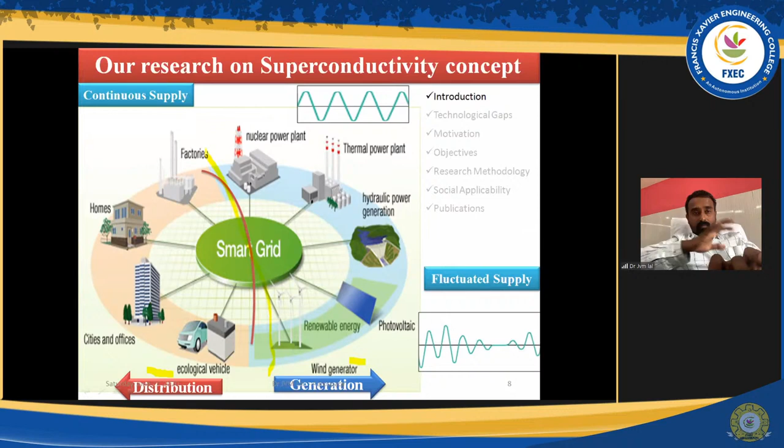Now, the challenges we face in smart grids are power cuts, voltage fluctuation, and major area is energy storage limitations. This is the major area where we are actually facing trouble in this scenario.

Now, economic losses—this is one survey we did a couple of years back, maybe around 3-4 years back. In this survey we considered only a few industries; we didn't dive deep into the aviation industry or aerospace industry.

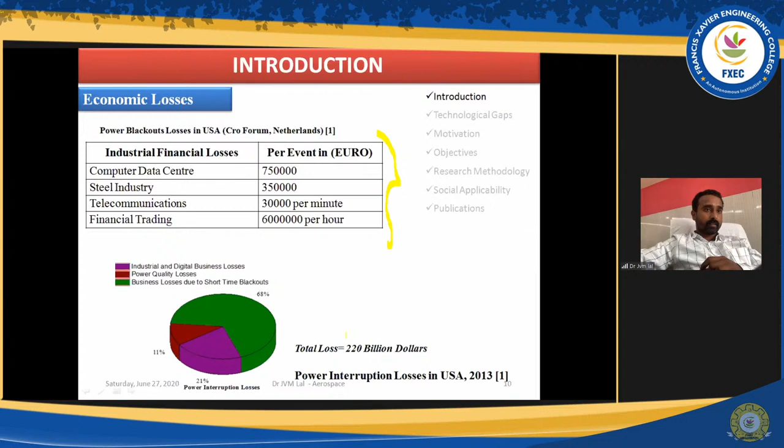Later on we went into the aerospace industry too, I will come to that point. We could understand the losses are around a few millions, and others you can see $220 billion—you can imagine how much loss we could... $220 billion, you can imagine what the losses could be that we were able to understand.

And we could find that storage was the essential problem behind this smart grid or the power generation and utility. In between these two, the actual vital phenomenon playing a role is storage.

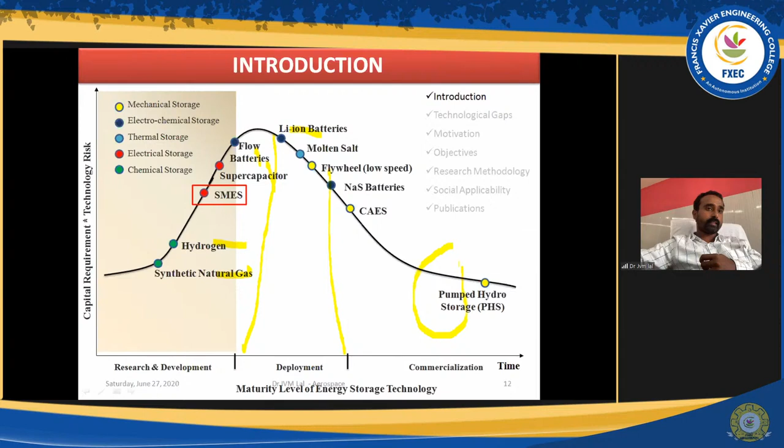Again, in storage also plenty of resources are going on, such as synthetic natural gases, hydrogen, batteries, lithium batteries. You may think, you can see here, it is already in the deployment stage, and this is actually in the commercial stage. But these guys are still in research, many concepts. You may please take a screenshot of this.

This will help upcoming researchers who could work with superconductivity. We pick this majorly because this is a system wherein we can store plenty of energy with a small device. If we could develop something with this superconducting magnet, that will be helpful for society. And this is not only in India, plenty of researchers are doing work in this area, the SMES concept.

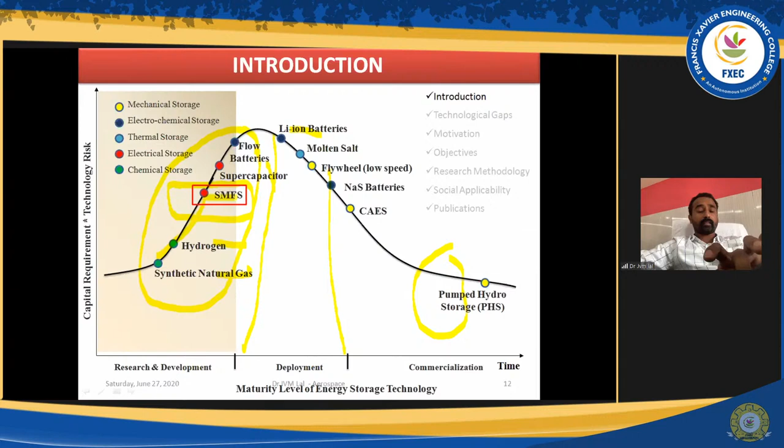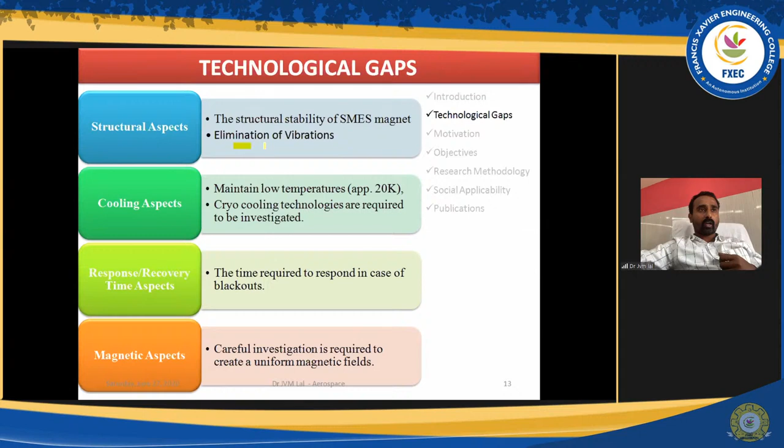And so again, technological gap - what we could find in structural aspect, cooling response, and magnetic, all four areas we could able to find the technological gap. The structural stability in terms of how we could eliminate these vibrations, and maintaining low temperature, that was a very difficult task.

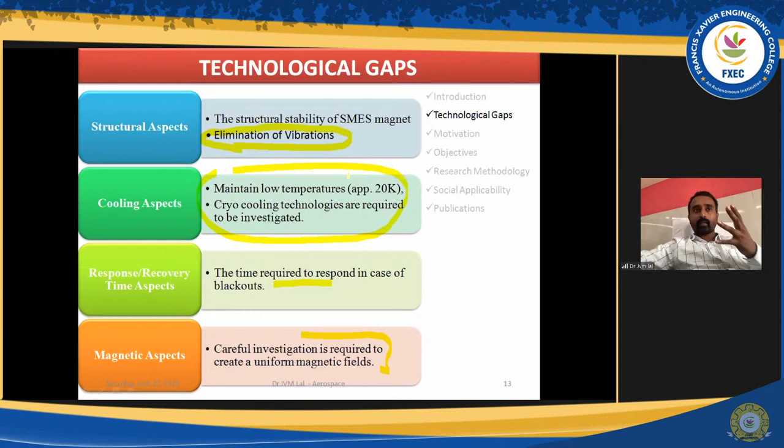Throughout our literature review, these are all the areas you can actually work out in superconductivity - this cooling property, how it could be done, the time required and response, and investigation required for uniform magnetic fields. These are the four major areas we need research in the field of superconductivity. So young researchers, this will help you, directly giving you the four major points you could work on: elimination of vibration, cooling - plenty of research is going on this, response parameters, and even in magnet, how we could create a uniform magnetic field.

Is it possible? There are plenty of simulations. Of course, we have to agree that we don't have experimental facilities in India, but simulation facilities we do have, and plenty of simulations are going on in plenty of universities. And what motivated us to do this first thing - already we could find a very big research gap.

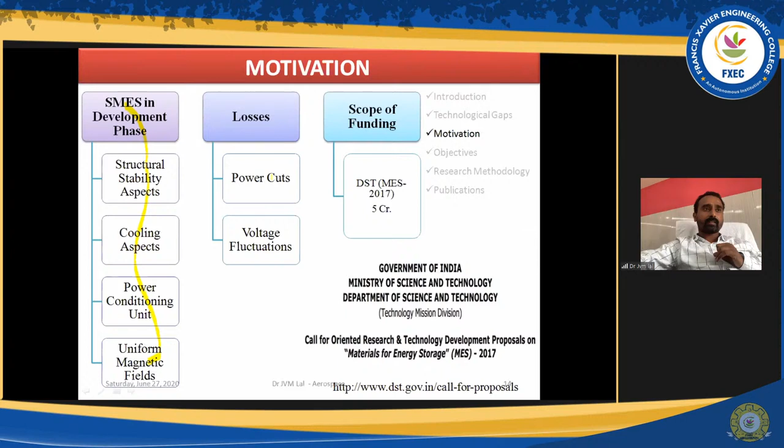So there is some fundamental gap which we could play with - that is the first aspect. And the second is this voltage fluctuation and power cuts problems society is facing. Don't take this only in terms of public or domestic utilization - you have to virtually imagine this in the sense of aerospace industry, propulsion, everywhere. Energy storage, if it is possible, that will help you. Moreover, every year, this area will help you.

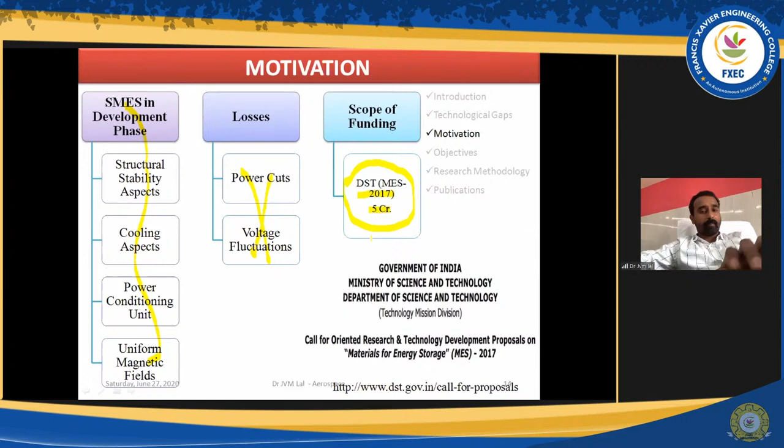I would like to give you fantastic information - DST and government funding every year spends around 5 to 6 crores only for energy storage and materials for energy storage. Look at this, every year they are spending this. So if you could come out with an excellent proposal, that will help you. Kindly note down all this information.

This will help you. In our research, our major objective was, as I discussed before, this stress and strain analysis and cryo-cooling cycle - could it be possible, and how this HTS tape configuration insulator can be given, how much thickness of insulator, how many layers we have to give. This area we have worked out, along with uniformity in energy storage estimation and uniformity in magnetic field transfer. These are all four major areas which we are working on with respect to the gap we found in the structure. Kindly note down, you can also work in this area.

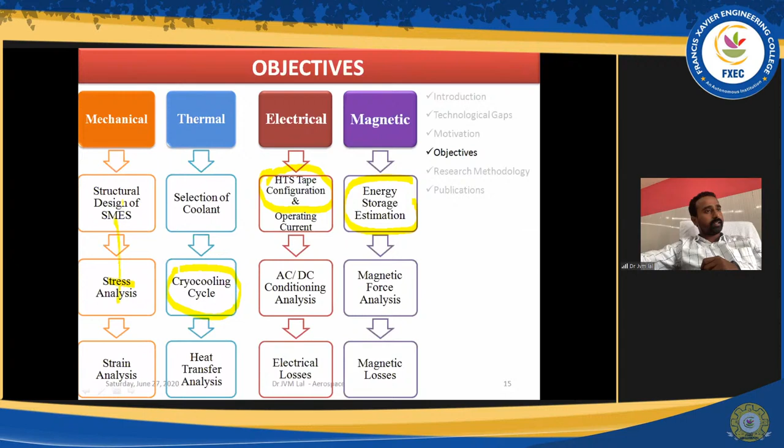We are having plenty of results. We could produce plenty of results - cooling area, and the major issue is this magnetic aspect.

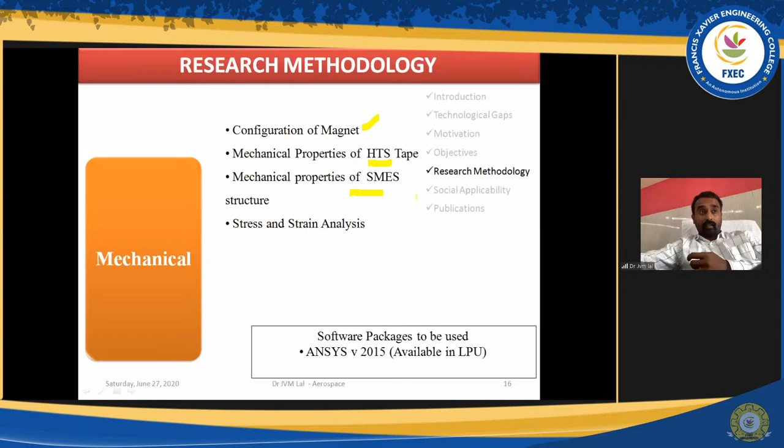Now, mechanical research methodology - what we configured is a magnet, HTS tape, that is insulator system, and SMES structure, how much turns or how many coils we have to give. That is what - how many coils we can give, how much gap we can give. That is what the simulation we work with, and stress strain analysis in the field of mechanical.

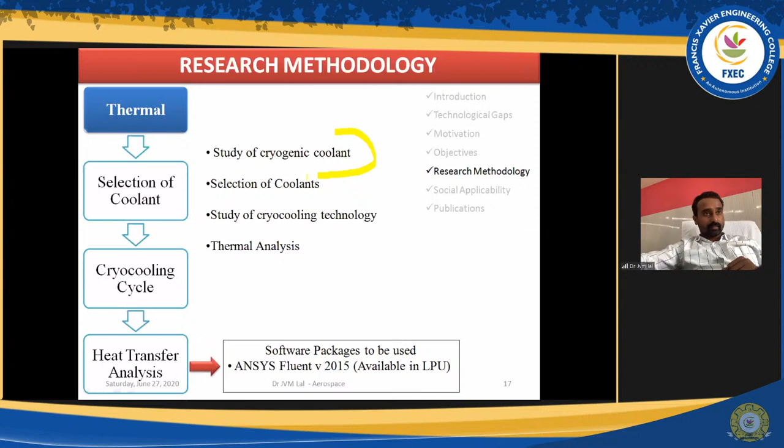And in research methodology, what we use with thermal is, first we studied on cryogenic coolant and the selection of coolant, cryocooling technology, and thermal analysis. These are the four parts we did under the thermal wing. So there are actually four wings: mechanical, thermal, electrical, and magnetic. In mechanical, I already explained which areas we worked with, and in thermal, which areas we are working with, I have already told.

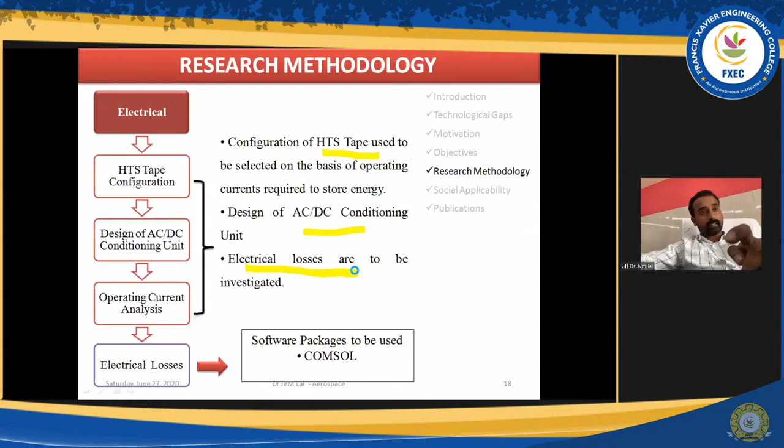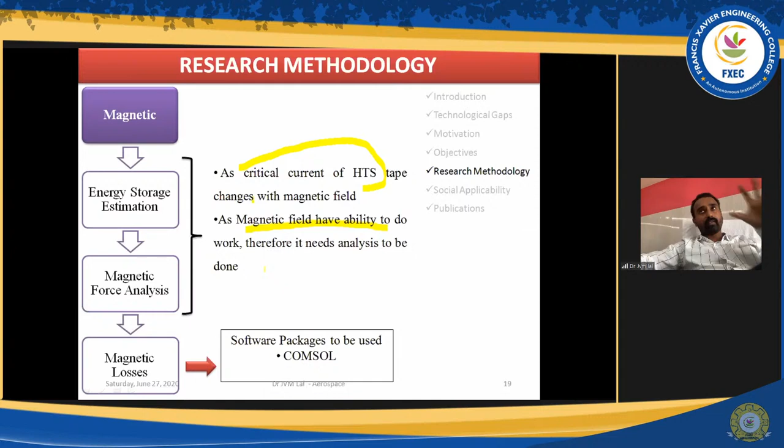And in electrical, the insulation part, AC/DC conditioning unit, and losses - electrical losses have to be investigated. So these are the four major areas which we are doing with the electrical part. And in the same way, the magnetic critical current and the magnetic field ability to do work with - these are the areas we are doing simulation, what we did and what we are doing in the magnetic area.

Out of limitation of time and out of limitation of our company profile, I couldn't give all the results, but I could give some of the results of the research we have done so far.

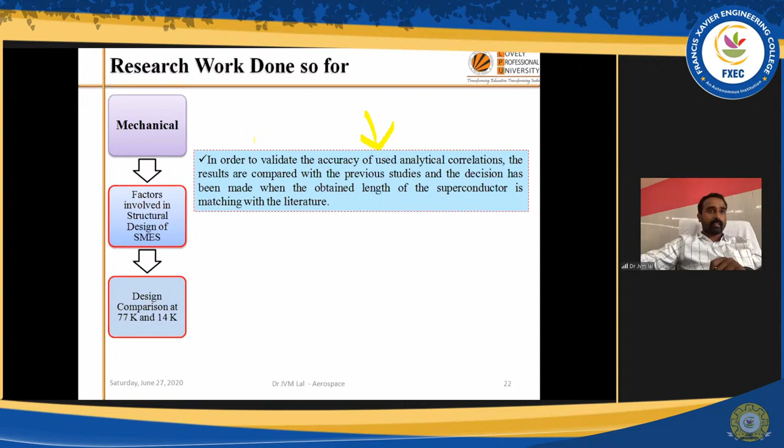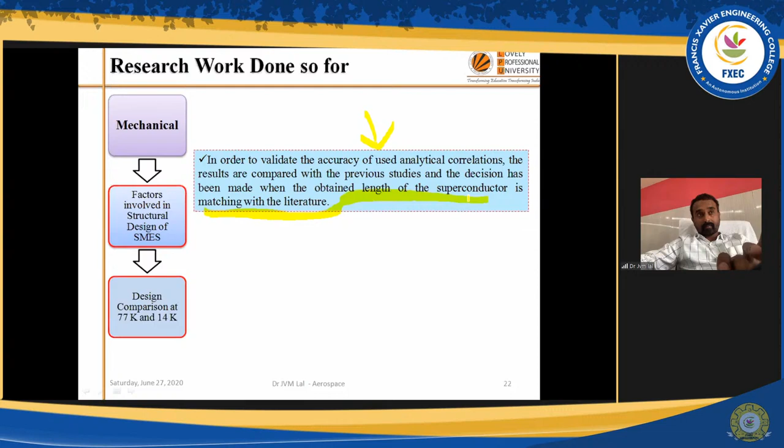Mechanical, we actually designed a comparison at 77 Kelvin and 14 Kelvin. The length of superconductor was matching with the literature. This is the accuracy used with analytical correlation. First we did our prediction to see whether it was matching with any of the literature, and it matched. Then we saw the present model reproduce the previous results with minor errors, which may be because of our operating facilities or mesh sensitivity. But in fact, it is actually matching with our results, and the old results also match with our results.

And AC losses we could find, and energy storage estimation for 77 Kelvin we could also find.

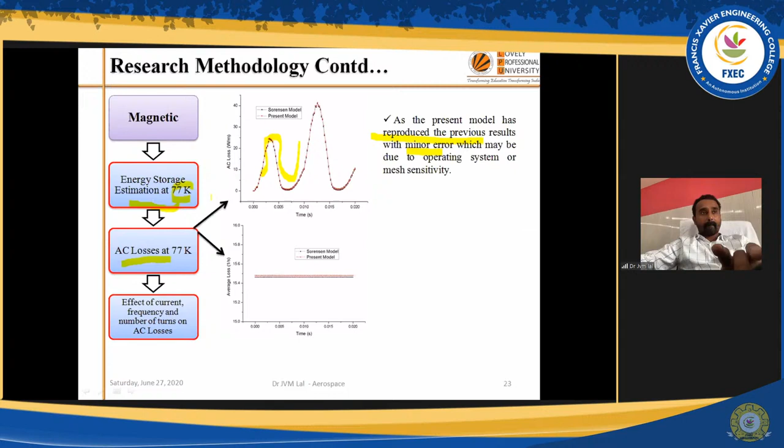And thermal, one second, there's my pointer. Look at this. We don't have that much difference between the prospect which is existing and what we did. There was a very small change which we could find, and these are all the variations we found in our results. What we used is COMSOL for this.

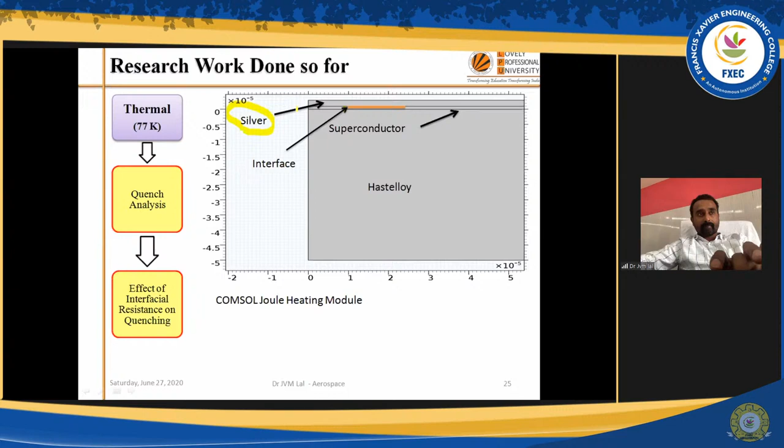In the thermal area, we worked with silver. I'd like to give you one piece of information: the best superconductor is gold, but economically it is not feasible, which is why research is going on. So if any of our researchers could produce an economically feasible material for the public or industrial society, that would be a great achievement, because very few people work with superconductivity.

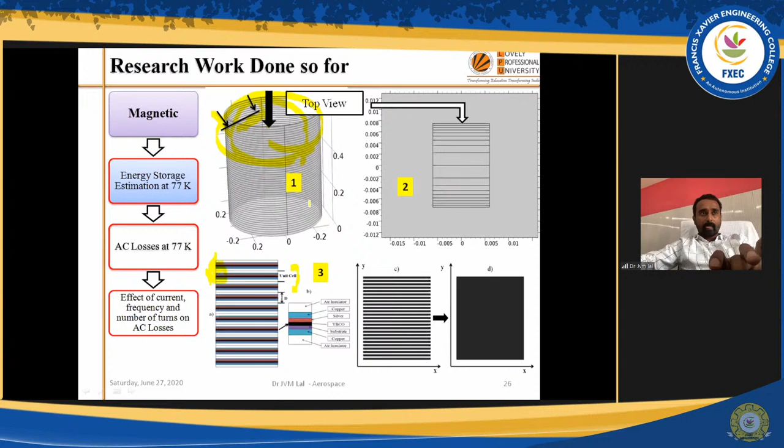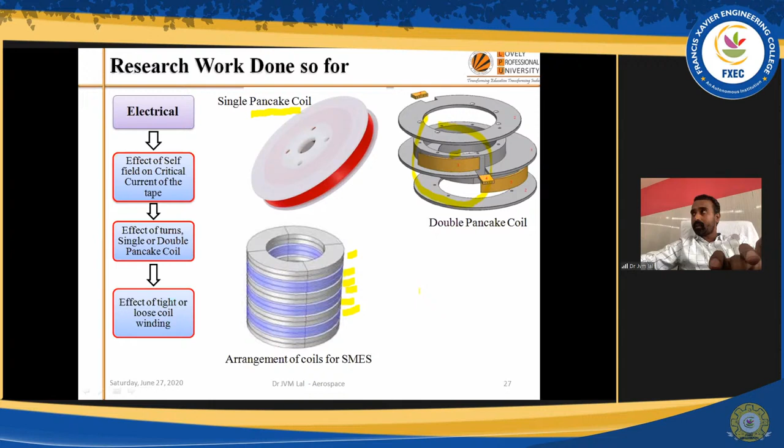In the electrical part, we actually used the pancake coil method. Look at this. We went for this type of coil method, and this is what it looks like when dismantled. Arrangements of coils for SMES - this is the type of arrangement we used. Electrically, here also we could gap the tapes, and we could find the effect of gap among the layers.

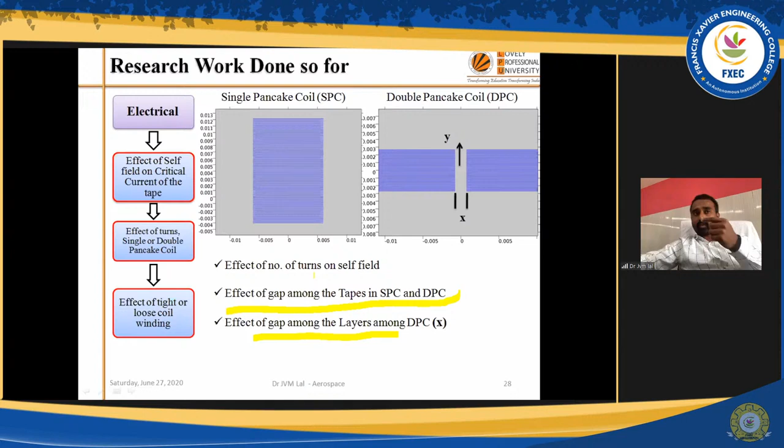We found the effect of number of turns. If we play with the number of turns, what actually happens? If we play with this gap, what actually happens? These are all the results we could find.

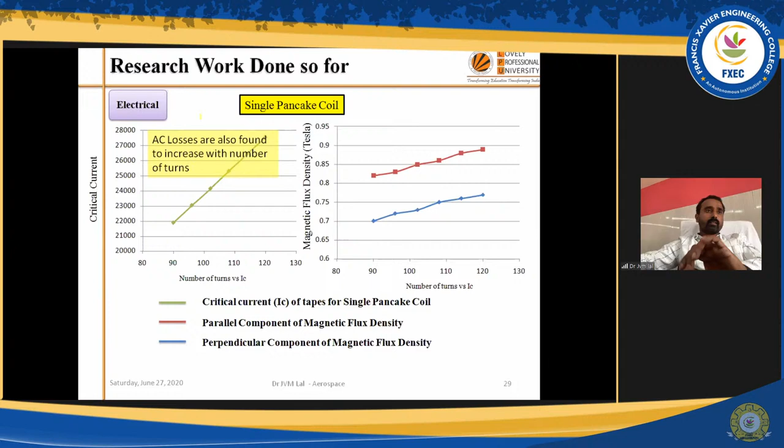Look at this - AC losses were also found to increase with the number of turns. This was one of the major findings in our research, that AC losses are found to increase with number of turns. Out of all this, it took around a few years, and we could find these terms.

So critical current and magnetic flux density - how it transfers, and the gap - how it drops down. So we have to take a balance on these two things.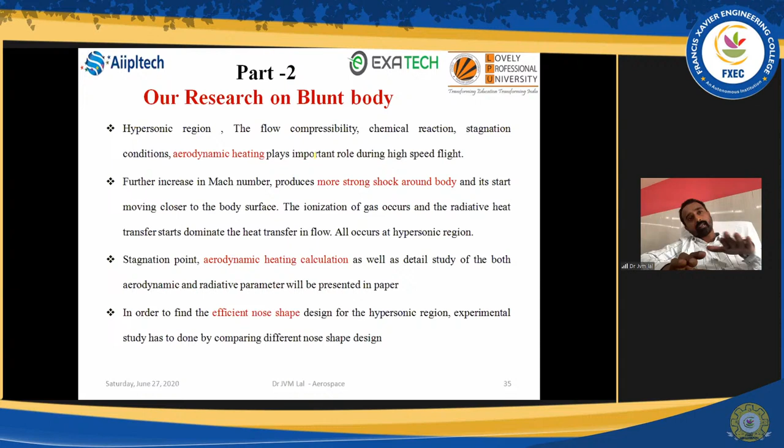Now we will jump into the second part of research on blunt body. Before that, I would like to tell you about hyposonic and hypersonic. Hyposonic is a technical term which we use for subsonic regions, low subsonic layer. Hypersonic is beyond Mach number 10, 11, 12, 14, all those stuff, and even hyper velocity flow regions is also there. As researchers you might be knowing, and you can fill with Q&As, I can explain you.

Now I will jump into that blunt body concept. Why we want to go for blunt body? If you consider this as a conical probe or a re-entry vehicle or an object, if it travels at subsonic level, this shock wave is not going to affect this body. But if you keep on increasing the velocity of this object, this shock wave initially comes here, then it will get attached.

Once it gets attached, this space gets closer to the body. Because this space comes closer to this shock layer, this normal shock layer, then it becomes a bow shock, then an attached shock, and then this guy plays as a radiating shock layer, absorbing heat with no gap to exhaust it. So it reflects, hits this shock layer, and again hits the body, creating a more strong shock.

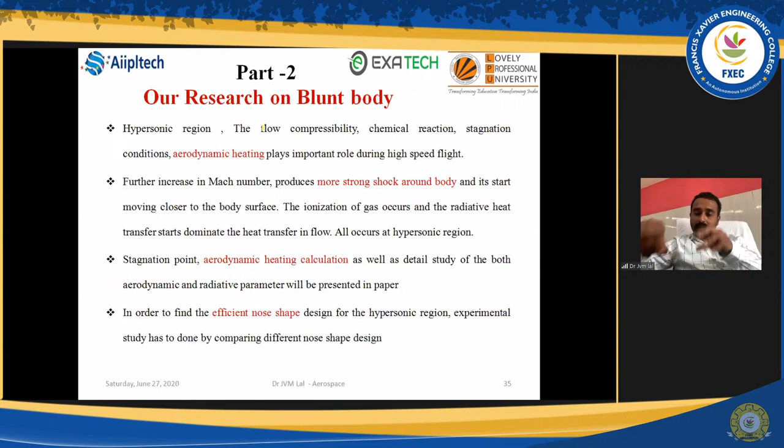Around the body, this aerodynamic heating calculation and efficient nose shape are the parameters we have to optimize. So we have to play with the blunt body, we have to play with the velocity, and we have to play with the altitude, and how the layer reacts, say at escape velocity, and once it crosses the troposphere, how it is going to react.

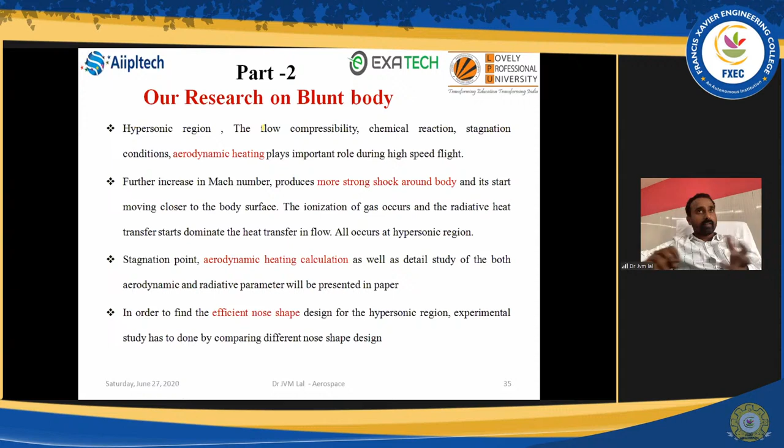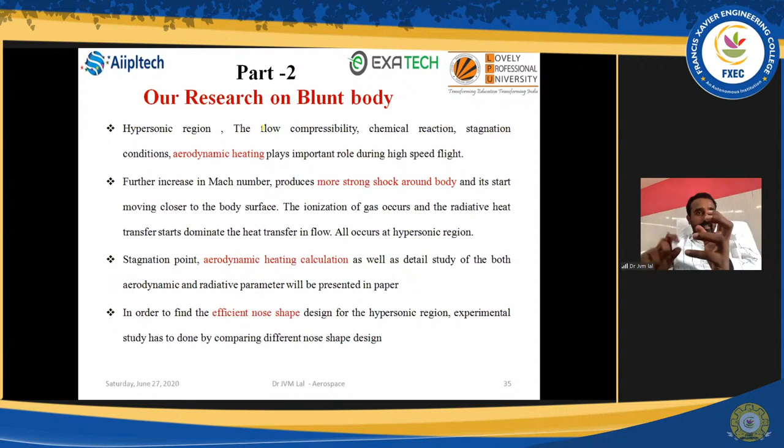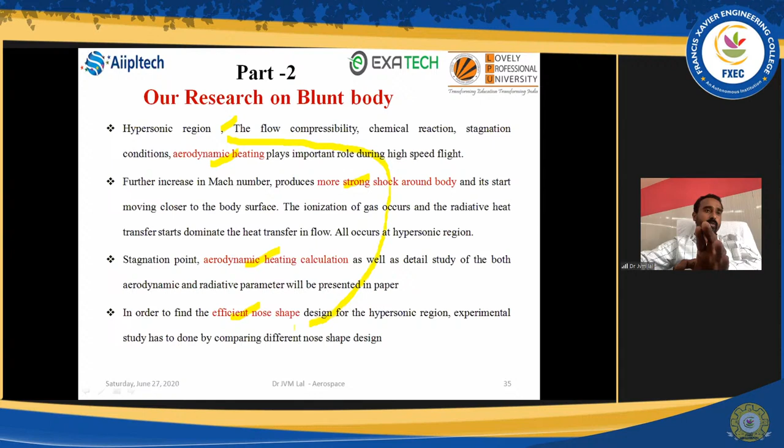So we have planned to come out with a coupled equation which could be useful for society, wherein for all these parameters - body, velocity, and altitude - if we could sync all this and give a common mathematical model, that will be helpful. This aerodynamic heating, more strong shock waves, heat calculation, and nose shape - we plan to optimize these four points in a generic equation.

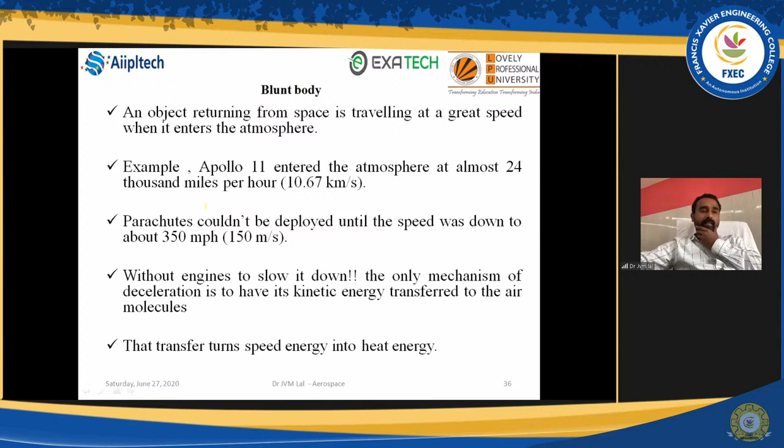Our objective was, for example, I would like to tell that Apollo 11, a few years back, once it crosses the escape velocity, it should have this velocity - imagine 10.67 kilometer per second. It will impact the region once it enters the earth's surface, and it is not possible to open or deploy the parachute at that velocity. So this object falls down at 10 kilometer per second, and we couldn't able to deploy the parachute even to reduce this.

So what is the only source? Energy. We have to play with the energy, no other source, because engine is not there. Once the vehicle re-enters, engine power control is not there, engines are not there. Only with the help of energy we are going to play. And what energy is available? Only kinetic energy, and the flow field around the body - that is what the two things available.

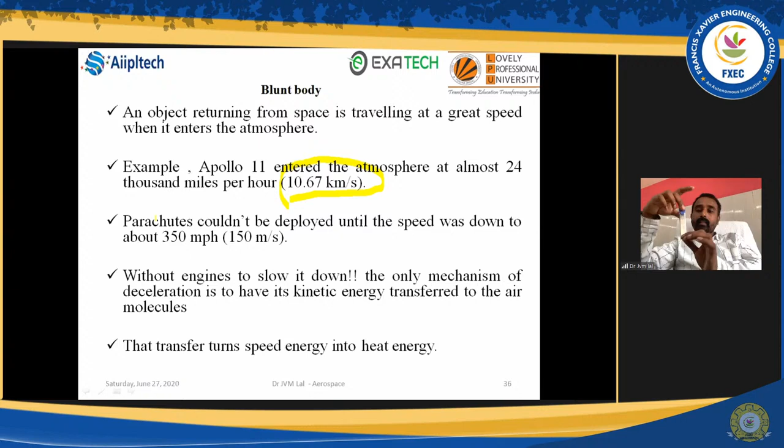The flow field, again, we have to control it. Heat energy plays a role. Got it? An object enters the earth - once it enters the surface, the velocity will be very high, 10.67 kilometer per second, and there is no power plants or anything which we could control. The only option is parachute, but at that velocity we can't open it - we can open only if it is 150 meter per second. So at this point we can play only with the energies. Energy has to be transformed somewhere, and we have to release the velocity.

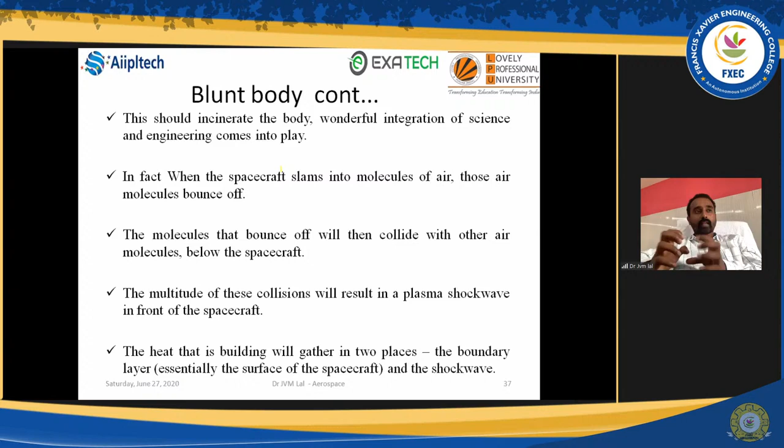And now the wonderful science comes into the picture - integration of science and engineering comes into the picture. So these air molecules will bounce off, and the only way we can play in this region is we have to play with shock waves. So detaching the shock waves, giving them enough space so that the heat can be transferred somewhere. We have to give a gap so that this generated heat can travel somewhere.

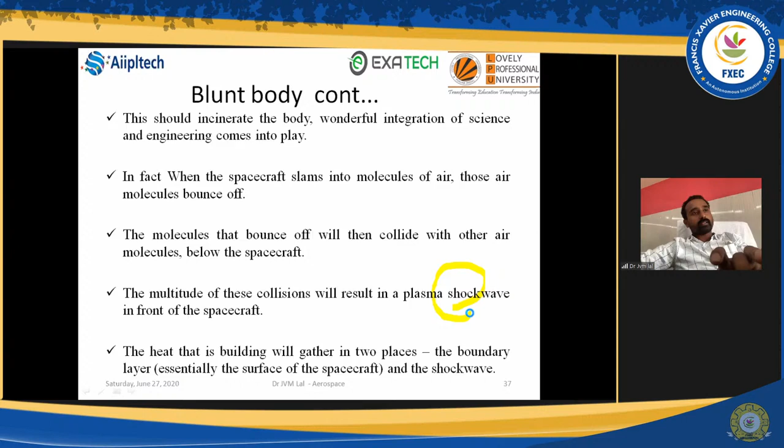That is the only option. That is why we went into this research and gathering shock waves, how it can be done, and how this blunt shape can be largely played.

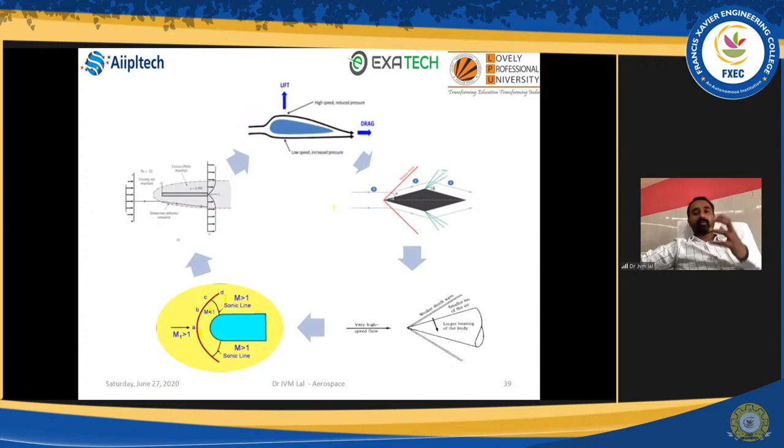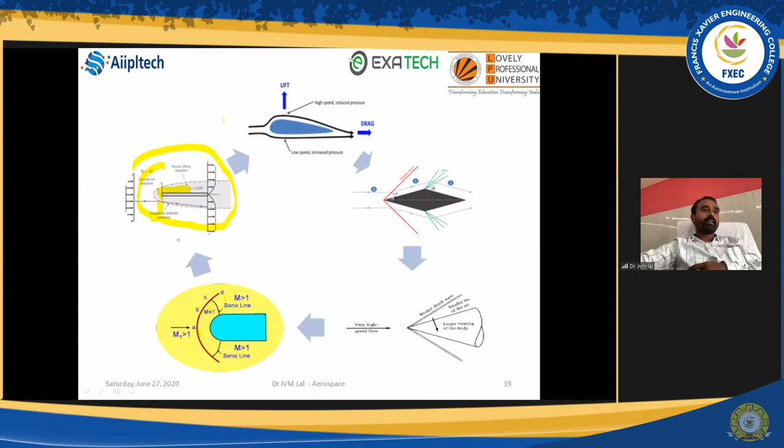These are all the areas we work. And this, like a food chain, there is an aerospace chain. You can call this an aerofoil chain or aerospace chain. Look, initially Pushpaka Vimana, those people, right from this, they started with a rectangle shape. So what they found was drag. Then we went to this wonderful design for subsonic, this shape, what we call airfoil.

Then we keep on increasing the velocity. We went for wedge, but the shock wave started formation, and it was attached, and it is not going to affect if it is within the limits. Altitude limit, no issues.

Then once we enter space, this gap plays a role. You can see this gap between the shock and the surface. This started playing the role. So now this generated heat has no way to escape. So it will hit back the object, and it tends to damage the object.

So again we went for this blunt body, so that we could detach the shock, and we could create a space. But speaking, it is very easy, but detaching this wave up to one extent, how we can enlarge it, what kind of angle we can give, it's a very big phenomenon which has to be done.

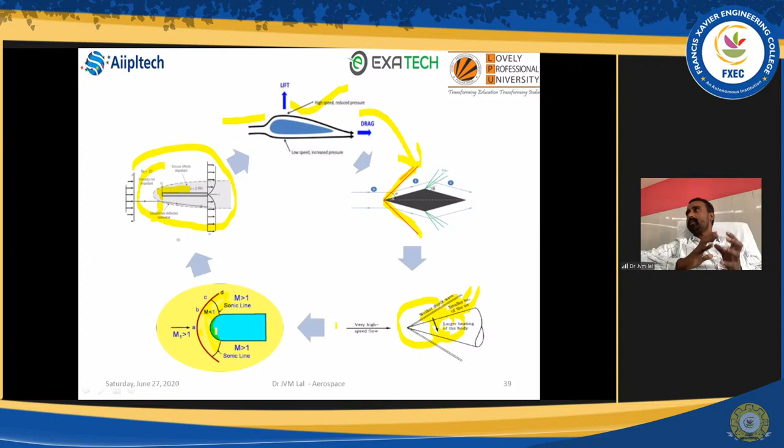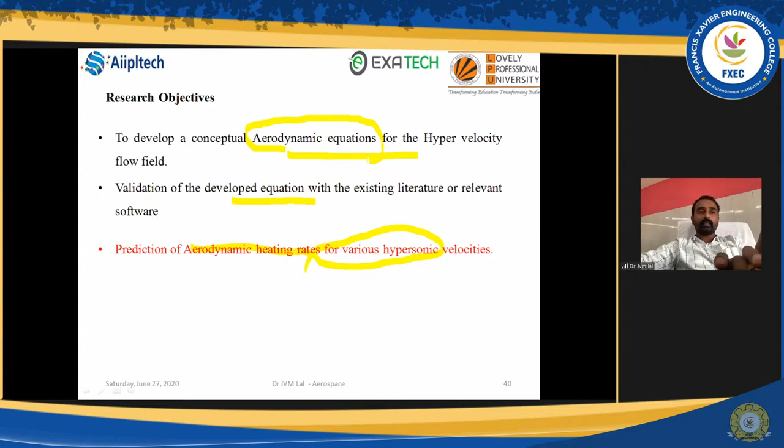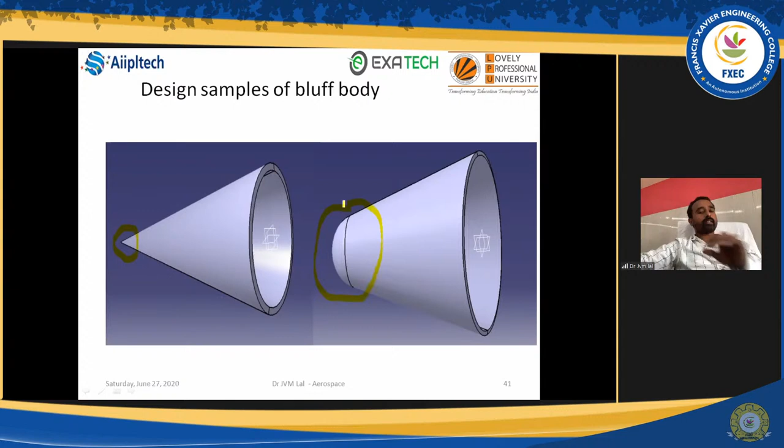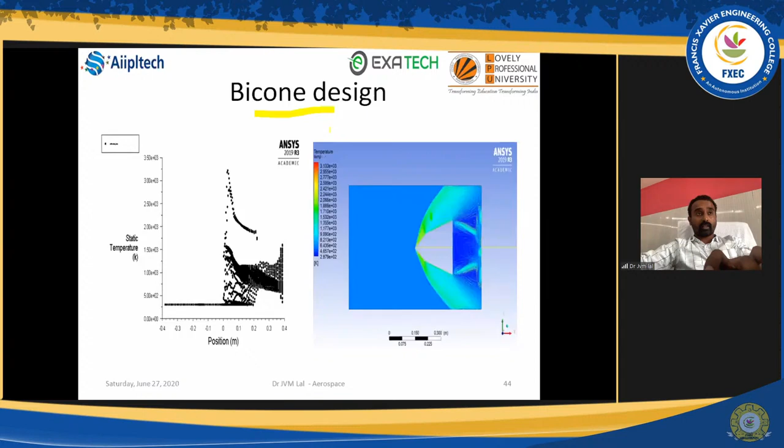So again, for initial stages, we try to create plenty of blunt bodies with the existing literature and with our own predictions. We could give some plenty of blunt bodies such as bicone, blunt cone, conic, blunt tangent ogive, and ogive methods. These are all the basic cones which we are working with. It is not limited. We are actually working with around 40 to 50 shapes and plenty of results. We could get thousands of results.

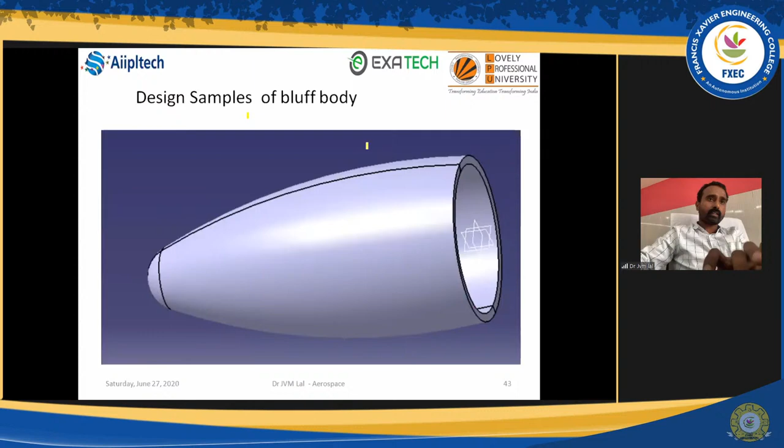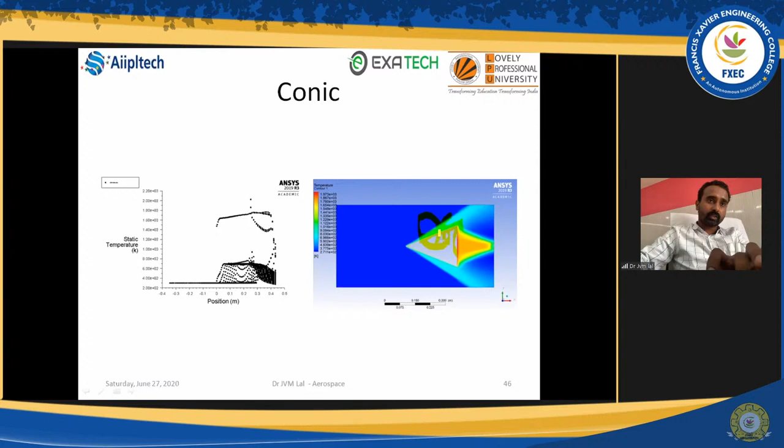On this particular research, in biocone, you can see the gap. You can see how it behaves here, and here how it behaves. And here you look, it is not at all suitable because this shock, there is no space for the heat to escape. And of course, the tangent ogive is okay, is fine.

And now we will jump into the 3rd part of our presentation, that is actually hyposonic and hypersonic flow instruments.

So normally, say we'll consider in sports dynamics or sports aerodynamics, football, racquet, cricket bat, stem, if you consider the sports, and if you go into the automobile front bonnet, backspace, the curvature, drag, frontal velocity, and those things we use. If you go with aerospace, every inch by inch we will collect and gather these aerodynamic parameters over it.

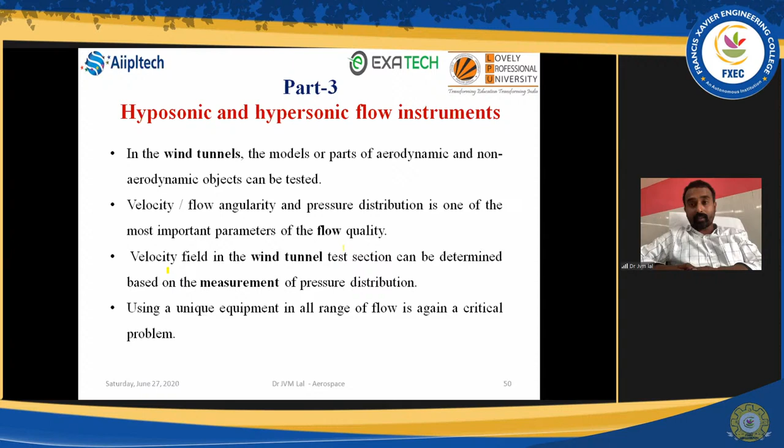Because as we discussed earlier, this cone - say, again I will take this as an example - if this cone decreases, we can go for higher velocity. But if this cone angle increases, the sensitivity of the reading we got will be good. So we have to optimize these two parameters. If we go for low cone angle, we can go for measuring high velocity flow. If we go for high cone angle, we will get a good sensitivity reading. So we are in a position to optimize this, where we could use it at Mach 2.5, or from Mach 0.1 to 2.5. That is what we were doing, and this is what we discussed.

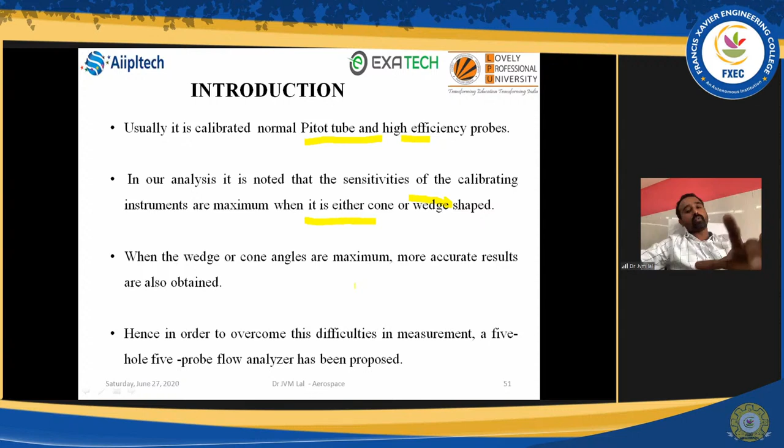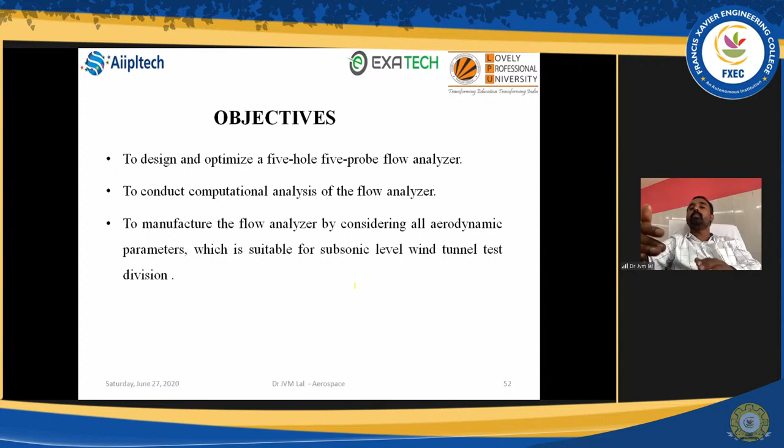Usually we go for normal pitot tube and high efficiency probe for supersonic, and even we go for wedge, sphere, maximum correlation - plenty of that. So what we have planned is, why shouldn't we go for a 5 probe with 20 tapping or 25 tapping, wherein we could graph it out and give a grid calibration methodology to the society and to the academicians, so that upcoming researchers can predict what might be the velocity at that particular point, which will help them move further for the next research. And this is what we planned, a subsonic level wind tunnel test division for different Mach numbers.

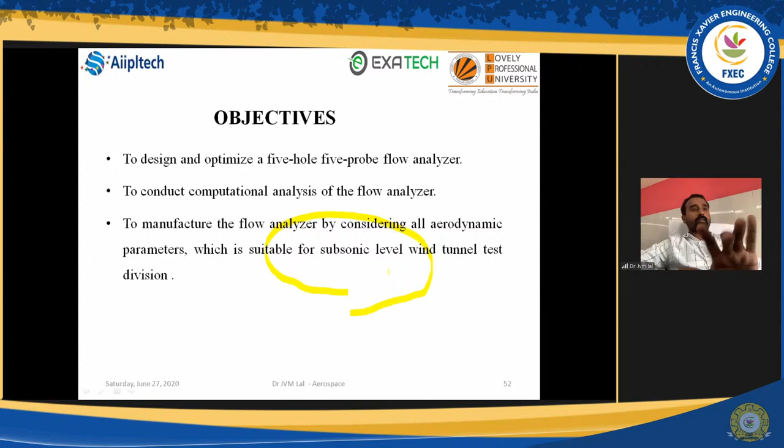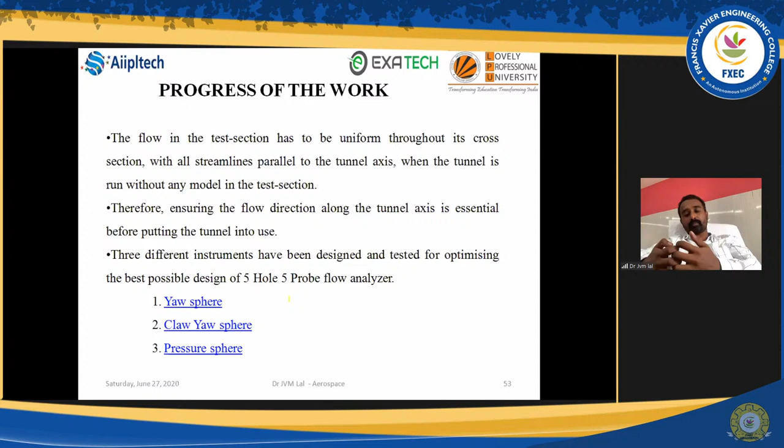Before jumping into this particular research, or before manufacturing or designing this particular instrument, we actually did a very excellent background work. Yaw sphere, claw yaw sphere, pressure distribution, plenty of others, thousands of others - they came out with thousands of results and thousands of instruments. We could shortlist a few of them which are relevant to our research, and we manufactured that. We experimented and we simulated, and we could come out with plenty of results.

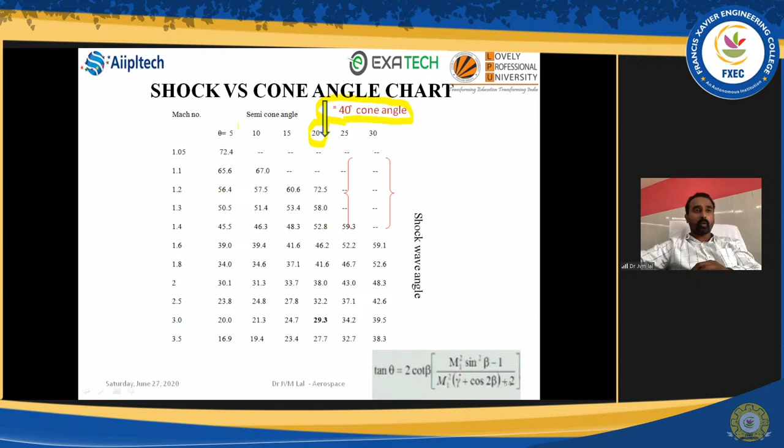These results, as per my suggestion, kindly take note of this - it will help you if you are interested in this particular area of research. This 20-degree cone angle is actually a semi-cone angle. In the sense, a 40-degree cone will be best suited for up to 2.5 Mach, and a few areas are detached, as you can see from here. So you can see the shock angle will be 29.3 for Mach 3. So it will be well suited.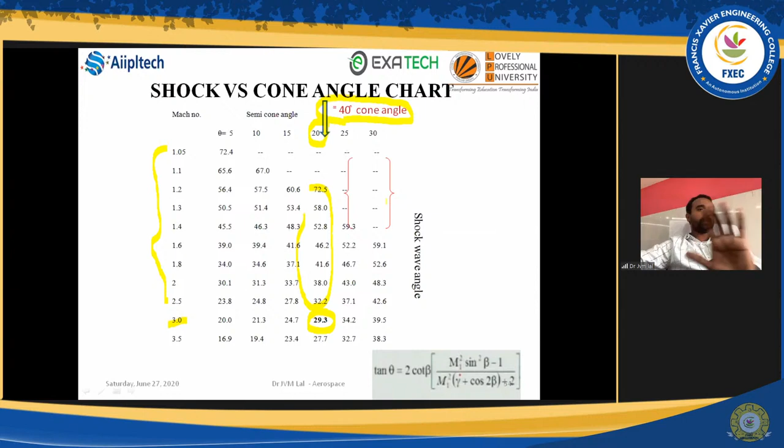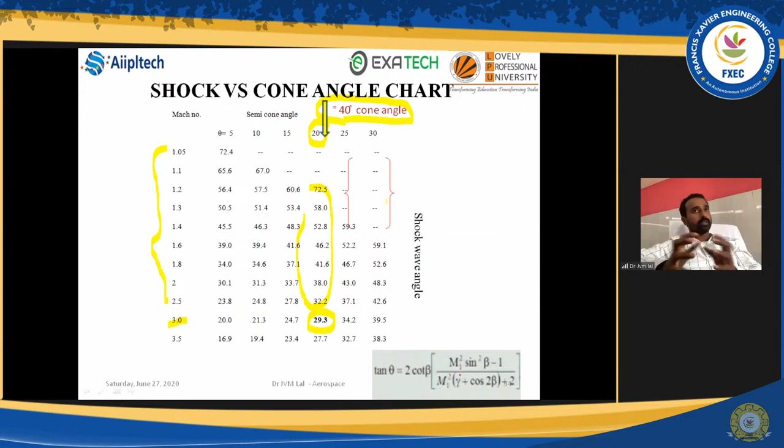As per our research, in the upcoming slides I will let you know how it will be. So hope you understood - again, I am repeating, once the cone angle increases, the reading we get will be excellent in sensitivity. Once the cone angle decreases, we can go for high velocities. So if you could play with these two parameters, I'm sure you can come out with plenty of results, and that will be helpful for the society, those who are working in this particular field.

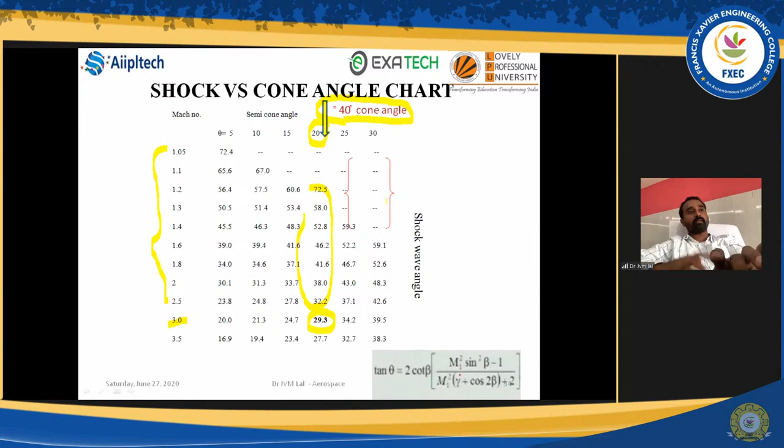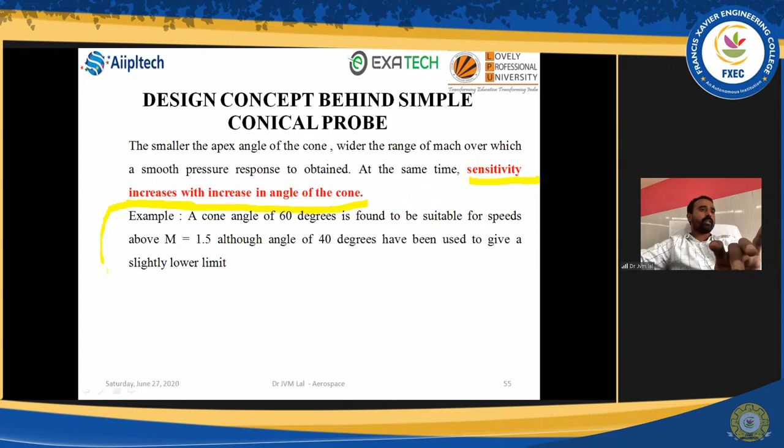This is what I was discussing - sensitivity increases with increase in cone angle. An example I have given is a representative one - you can read this, it shows up to what Mach number we can go, what is the shock angle, 40 degrees have been used, and why we can go there. So this is one example I could give you.

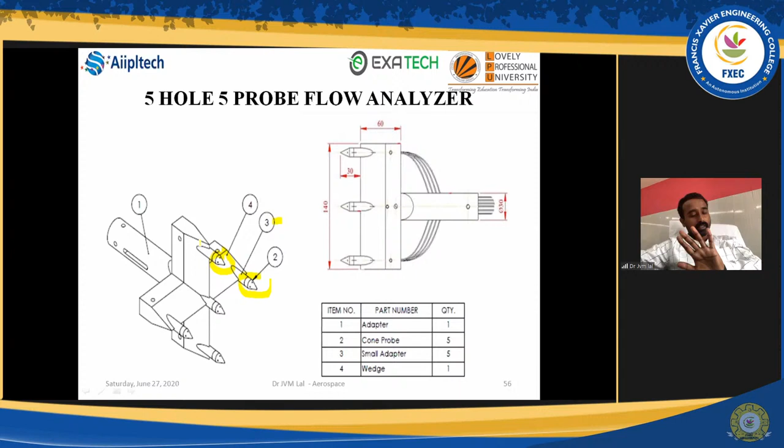Say, this is one of the probes we could realize, and very soon we are going to manufacture this. In the same way, 3 probes we already manufactured, and we had applied for a patent also. Look at this - there are 5 holes actually, so total 25 holes, and at a time you will get a 25 point grid. We could find around 1,000 grid points inside the test section, and we can plot that in a polar curve, which gives enormous data for the researchers who are going to use that particular facility.

Look at this. This is what we discussed, semi-cone angle. And one more thing you should know. So let this be the surface. If you want to predict the flow somewhere here, the flow holes or tapings should be perpendicular to the surface, not aligned with the flow. So you should know this.

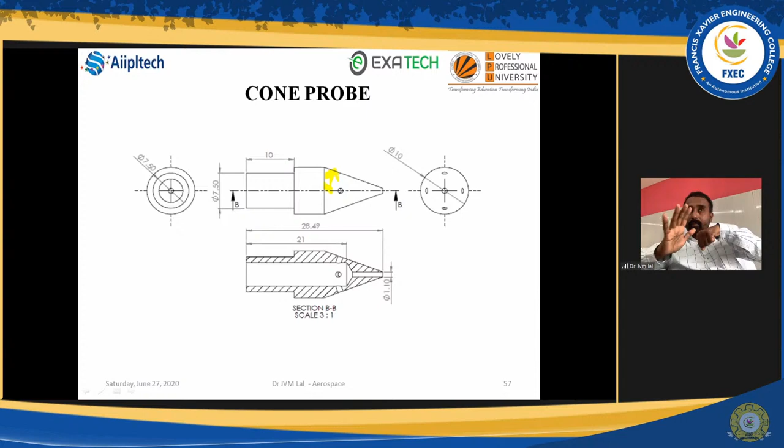Actually, you will get confused. Say, if you are going to use one conical probe to measure X or Y flow, let it be viscous or inviscid flow, that is not going to affect this. But these holes should be, as a thumb rule, perpendicular to the surface, not aligned with or parallel to the flow. Forget about the flow direction - flow angularity can be identified separately.

This should be perpendicular. Got it? This flow taping, kindly look into my screen. This flow taping should be perpendicular.

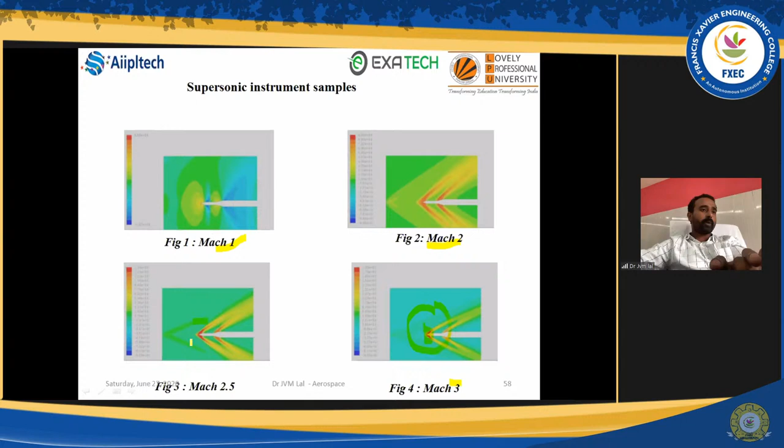Hope you understood. We played with different Mach number ranges - 2, 3, 2.5 - and we could find that we can go up to 2.5. So this is a wonderful result we got. And then we went for three-dimensional meshing also, and there too, up to 2.5 Mach number it was excellent, and 1.2 Mach number was also excellent. And these are all the 3D sample results we got.

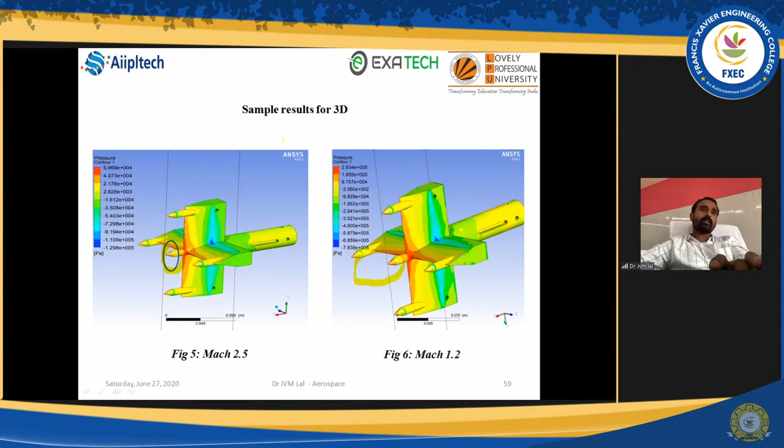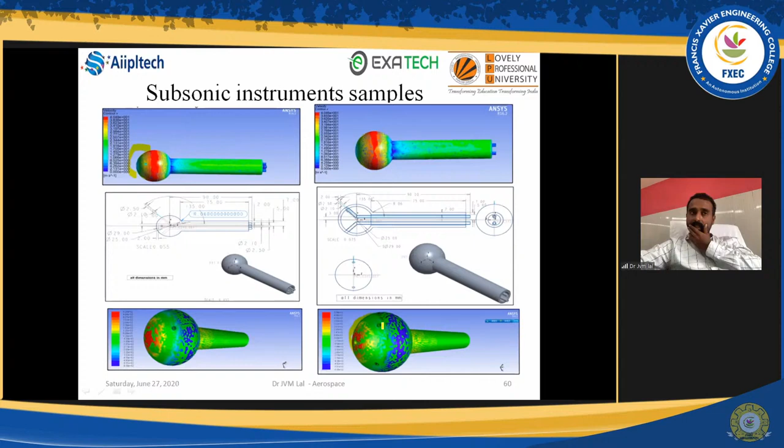We didn't stop with the research. We went for a sphere with 2 holes, how it could work, and with 5 holes, how it is working. And we have actually manufactured it, and we got experimental data also for this. If you are interested, write to us, we will give you the data, if you are really interested in this research in this particular lab. These are all the research outcomes we could produce.

I'd like to give sincere thanks to my research team. They have published more than 35 research articles, all SCI and Scopus indexed articles in the last 1 year. We have filed 3 copyrights, 2 books already published in the field of renewable energy and current trends in aerospace, and 1 PhD already produced, awarded, and 2 patents we have applied for.

So these are, I'm giving a very small background of the work we are doing, given time limitations. Again, I will summarize overall. I would like to summarize.

Superconductivity is an excellent area. If you are really interested in research, you can go for 4 major research gaps, or you can even work with all 4: mechanical, electrical, thermal, and magnetic fields. I have already given you the research gaps available, the fundings available for that particular slab, and the verticals you can work with. These are the 4 verticals you can work with in superconductivity.

And in blunt body, how this aerofoil shape plays a role, and for hypervelocity, blunt body plays a role. If you could give a generic mathematical model for all by optimizing 3 parameters - aerodynamic parameters, altitude, and velocity - this aerodynamic heating, the technical term for which is radiating shock layer, if you could optimize with these parameters, that is a good area of research.

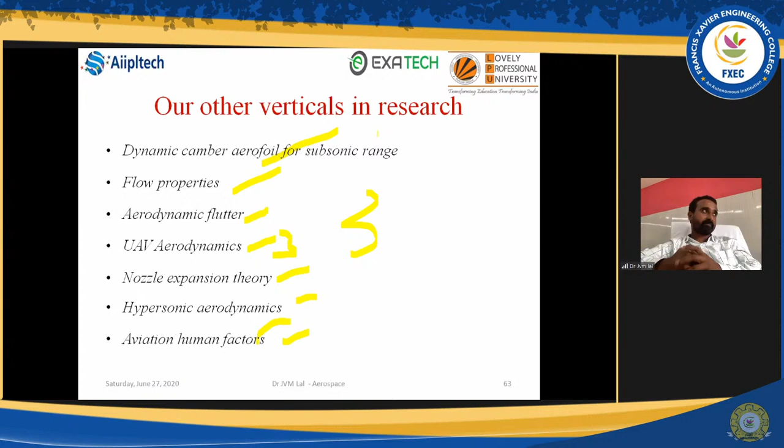Thank you sir, the final question from our participants: for simulation, do we use ANSYS software or any other? If you can suggest, sir, for simulation do we use ANSYS software, one of the softwares, or any other? I understood the question - wherever I go, there will be a question like this.

Actually dear participants, ANSYS, Nastran, MATLAB, COMSOL - all these are commercial software. So up to one extent you can rely on them. If you are a research beginner, you rely on these commercial softwares. Once you cross that level, you try to generate your own codings and your own mathematical model, which is what we are doing in our research.

I have shown you very few research slides because we have some limitations - many things are under patent and under publication procedure, all in reputed journals too. So I couldn't give all the results.

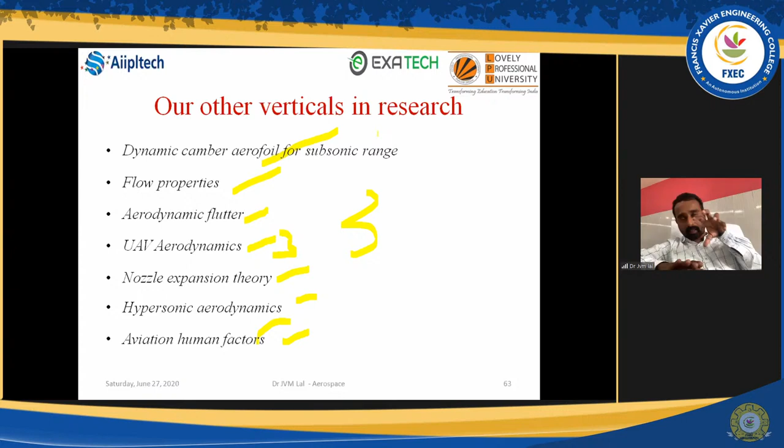But my advice is, if you are a beginner, work with commercial softwares. And once you come out of that vertical, if you are in the next slab and really want to prove yourself in research, go for your own coding, generate your own software - that will help you in a big way. It is not that difficult a task, but you need a dedicated team. And I'm sure you can do it.

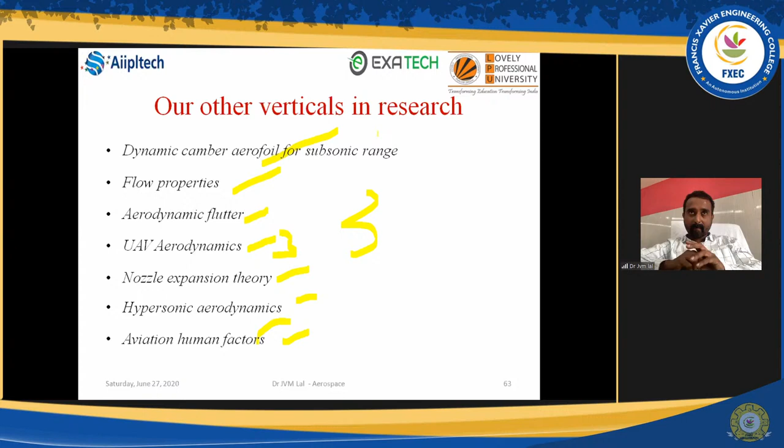Okay sir, thank you for your clear explanation for this session, sir. Thank you, thank you very much.